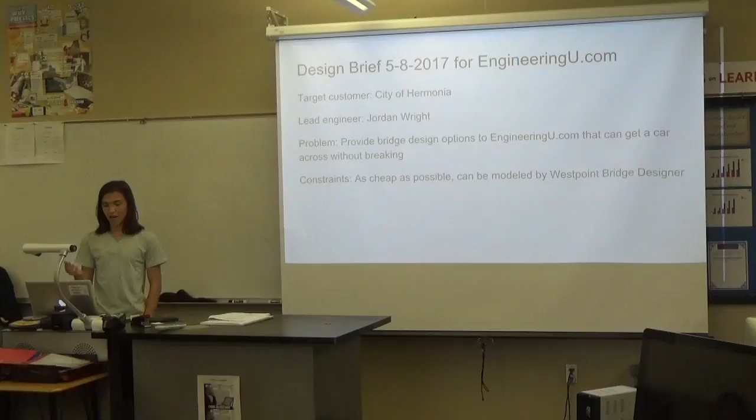Firm, presenting the Mini and the Worm for POE. So design brief here. We're making it for the city of Hermonia. I am the lead engineer, and we were trying to provide different options of bridges for the city of Hermonia through engineeringu.com that can get a car across without breaking and can be modeled by West Point Bridge Designer.

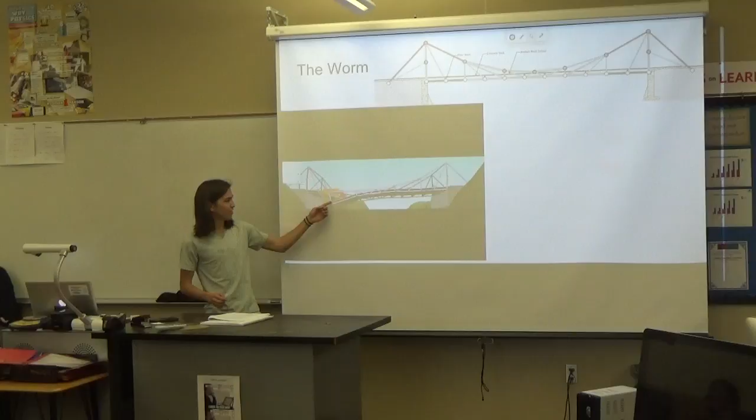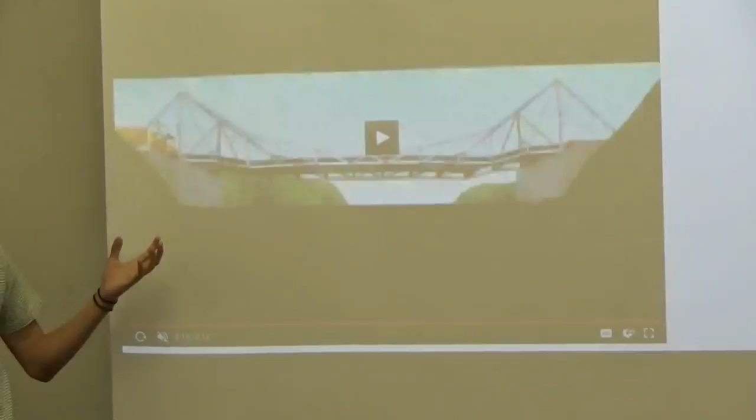The first one is the Worm, and it is titled thusly because you'll notice that the different types of steel allow it to curve like this, which we think would be very interesting to watch for the children of Hermonia. It would get them interested in physics, it would get them interested in engineering and design, and it will be very similar to most roller coasters where you kind of fear for your life just a little bit.

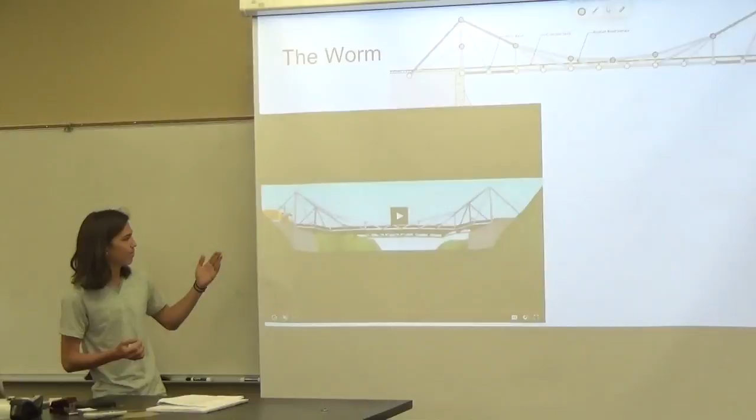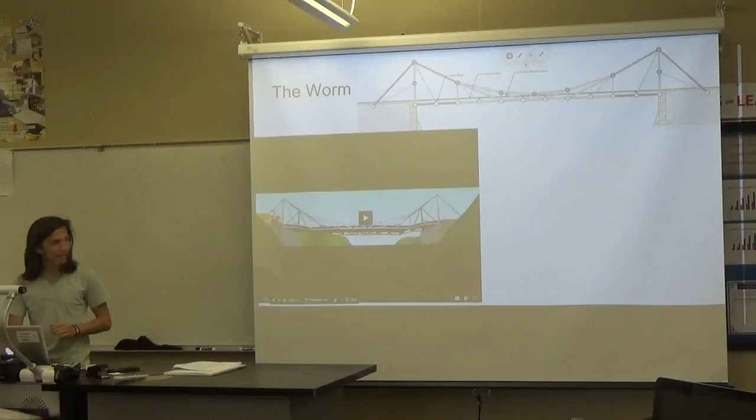I think that it would be excellent if a school bus was the same weight as this truck, you could go down and have some swoops, and the children would maybe enjoy going to school a little bit more. So the design, as you can see up here, we used a lot of different types of steel, and we used some very thin joints over here so that it would have dips at the ends here where children wouldn't expect.

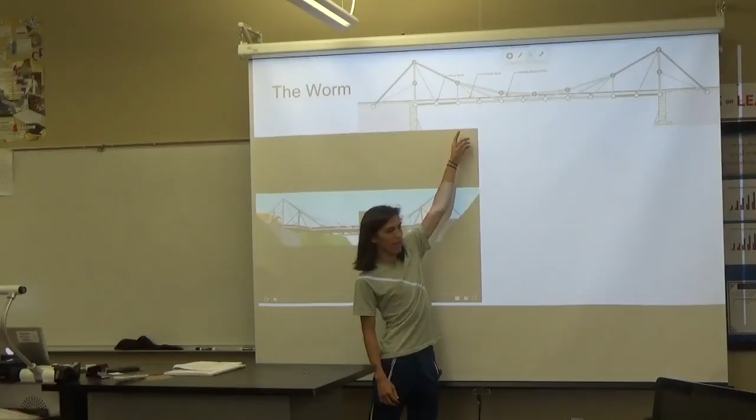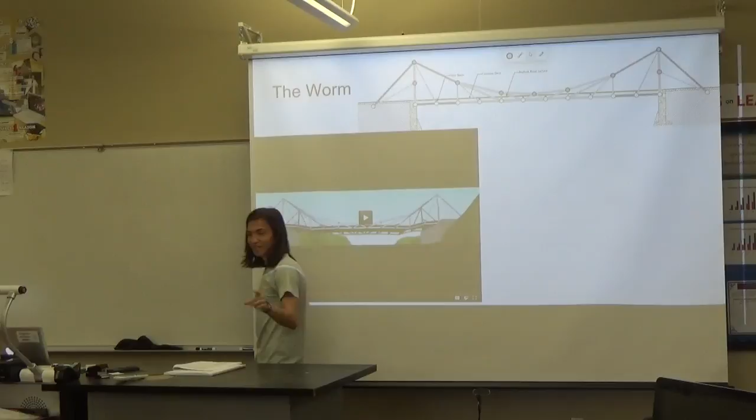Usually kids would expect the dip to be in the middle, but it's not, because that's too easy. So we had the dips being on both sides so that the kids won't expect it and will maybe stop eating on the bus because they keep spilling things.

So finances for this bridge, it was kind of expensive. We used a lot of different parts, and a lot of them are very long, and we had to use all sorts of different, the most expensive steel for some of them. We thought that tempered steel would have a little more stretch to it and allow the bridge to bend. That was the idea there, and then having it thinner would also allow it to have a little bit more give to it. So this bridge did cost a bit more,

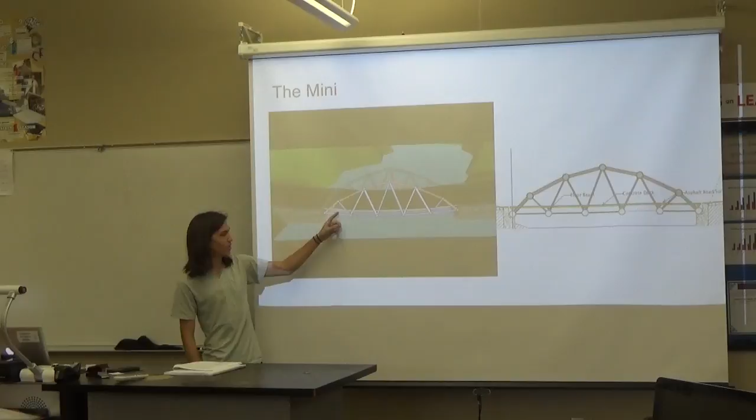That's my bad. Okay, this is the Mini. This is a bridge designed to have a fun-sized bridge that is much, much smaller. So most of the cost of this is excavating all the way down to the minimum height, and then we tried to have each bar be under maximum tension or compression. And for some of these, it actually goes under both. It goes very green and very blue and very red.

So there's a lot of strain on all of them, and we used hollow tube for the parts that went under compression because we figured that it'd be able to, for the money, take the most compression, whereas these, which were mostly under tension, we had solid bar, and we had mostly high strength, low alloy steel, and then 1 bar of quenched and tempered steel, because, I don't know, it worked for some reason.

And this bridge was very well optimized with each member taking quite a bit of strain. If a truck weighed just a little bit more, it would probably break this, but luckily we have identical trucks going across here one at a time, waiting their turn very nicely in this city. So that's very convenient. And yeah, that's this bridge. It was pretty cheap.